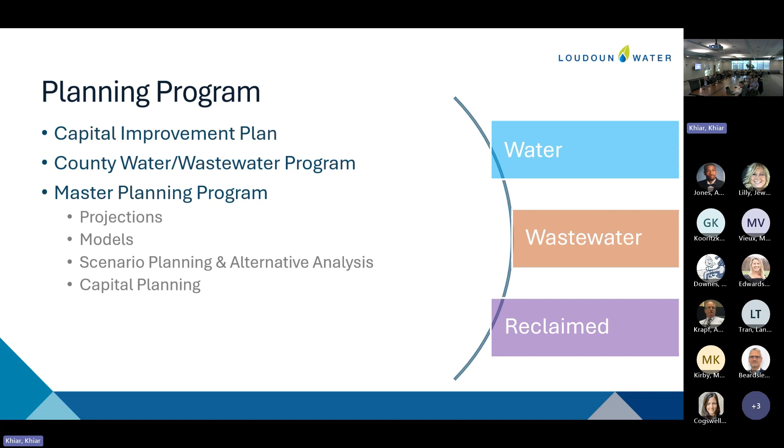And each of those master plans is going to include some projection work, which we're actually underway with - models, which we'll talk a lot about today, how we use those models in developing scenarios and alternatives, and then how that leads to capital planning.

The process of master planning hasn't changed for a long time. We start with the data we have or that we know, put that into some sort of model or projection, and then do the analysis on that. Today I really want to talk about the data, the modeling, and the analysis we do, not really the whole planning process.

We're really going to focus on the water distribution system planning. We could talk about reclaimed, which is very similar. Sewer gets a little different because it's all gravity, but the water distribution system is one of the keys we work on, mainly because that's one of our key public health and safety issues.

We need to maintain pressure, maintain fire flow, and maintain demand capacity under current and future conditions. We try to make sure we do that reliably, making sure we have redundancy in our system so that everything is networked, with multiple paths to get water to a location.

We're always looking for alternatives that help with cost. We want to make sure that whatever we put in the ground is right-sized for now and for the future, so we don't have to come back in a couple of years and build it again.

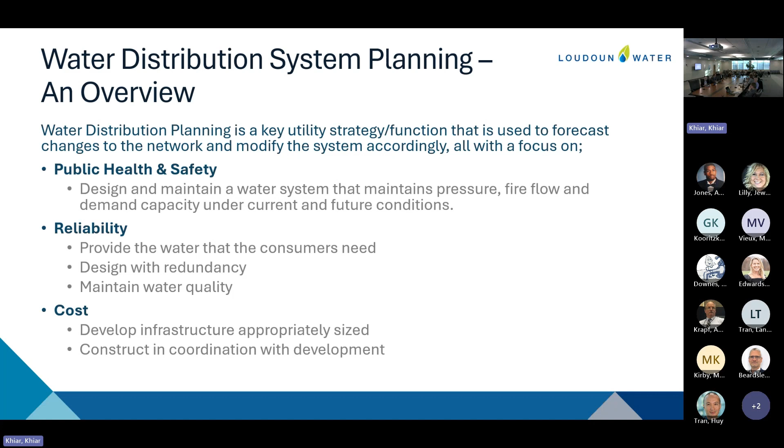It's very expensive, so our work is partially looking out to the future, but it's also day to day. It's kind of fun because we get to work on operational issues like helping our development team coordinate sizing and locations, reviewing fire flows. We also look a lot at maintenance outages or outages related to new construction and how that might impact our system, like whether there are concerns about when we can actually do construction or meet the demands we have.

We're one of the few teams at Loudoun Water charged with looking way out into the future, 20 to 30 years, trying to think about what we need to help support our whole system, whether that's permits, the capital program, or developing projections that lots of our teams use. Because of that, we're also one of the teams that does a lot of regional outreach, talking to our neighbors to understand what's going on not just here but in the region. So it's a great mix of daily stuff and the future.

So we'll dig in a little bit to the data that we use, which I love - we have such great stuff here, the tools we have - and then how we put it into action. I'm going to start with the data side.

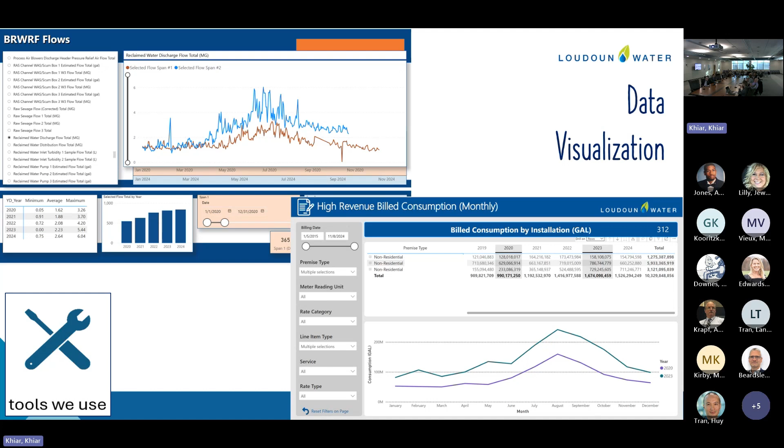But today I'm going to talk mostly about the water modeling that we do. I like to say it's mostly just lights and camera angles, so it's not that hard. But we do lots of different types of models in-house here that we manage. Our water distribution and reclaim distribution systems have all-pipes hydraulic models built for those. The wastewater collection system currently has a large pipe model, not every pipe, because wastewater is a little different than water since it's basically not networked the same way.

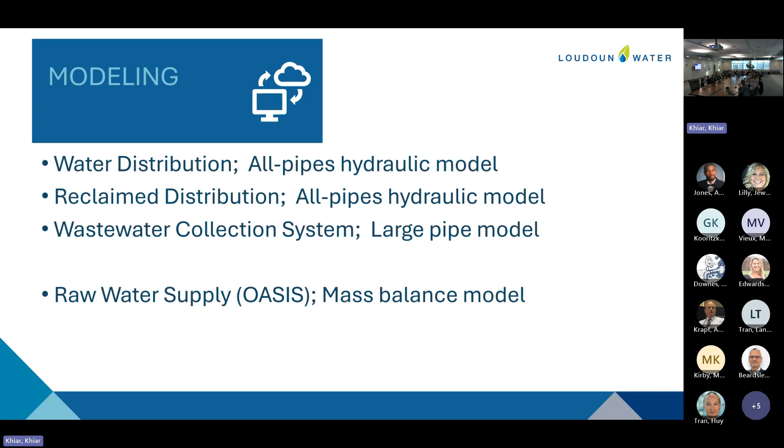We also have a raw water supply model that we're still in the early stages of, which Pam will talk about a little bit later. So we'll really dig into this all-pipes model, the distribution models, because those are our key tools. We take advantage of this model in a lot of different departments, a lot of different ways. We use it for operations, looking at outage planning, and we'll talk more about that in a few minutes. We also use it for master planning when we're looking at growth and developing the capital improvement plans.

So the modeling is basically helping us organize the data. It's a little philosophical, but it helps us organize the data so we can make sense of it and use it more properly. We also recognize that models are never precisely correct. When we have 85,000 different demands, different meters every day, changing all the time, there's always something that's not going to be exactly what's in the model, but they're pretty close and very useful for us.

The model itself is based on known physics, known energy equations. In one pipe, it's very easy to figure out what's happening with the water. But when you build a network of pipes, it gets very confusing because there are so many options for the water to move. Basically, it's a lot of energy equations, and we lose energy in the pipes as the water moves through, due to friction and as it turns different directions, so we have to figure all this out.

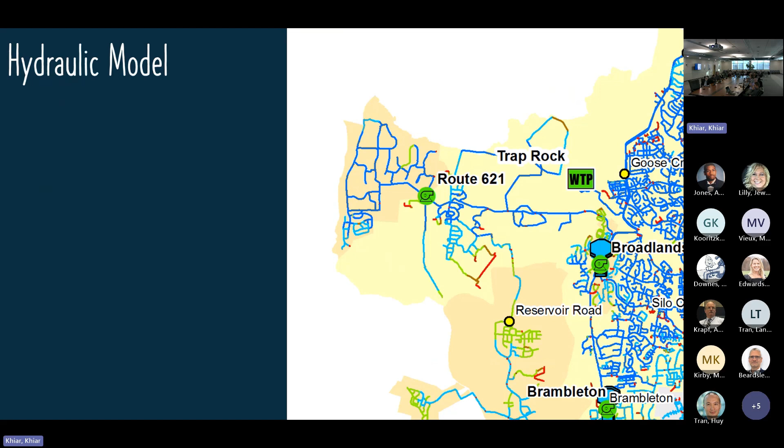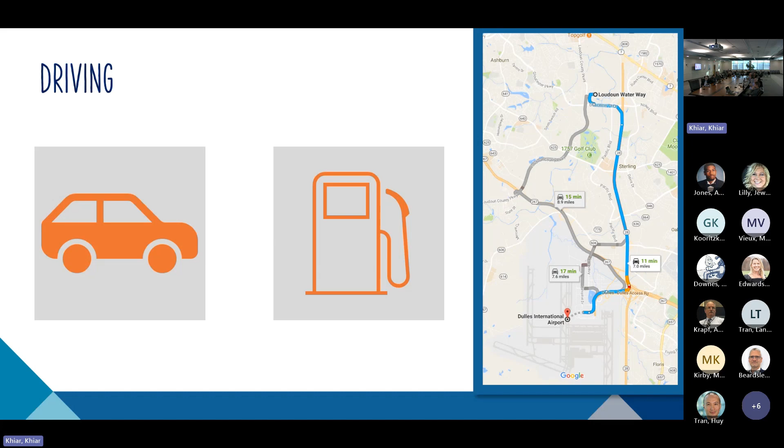If you want a parallel to what our network looks like, you can compare it to transportation or driving. Most of you, if you had to go to the airport after this, might pull up your map on your phone or in your car, and you kind of know where you're going to go. It would tell you if there are any blockages or outages. It's very easy to use, but there are a lot of parallels. If you went there, you'd probably go on the biggest roads that carry the most traffic. So in the water system, the roads are kind of like pipes. They're very networked, with lots of different ways to get to the same location.

The intersections are kind of like nodes or junctions. Stoplights are kind of like valves - we can change the direction or stop flow if we have to. And the cars kind of move like water, while the destinations are the demands. So a destination like the airport has a large demand, while a destination like your house probably only gets a few cars a day - it would be a small demand.

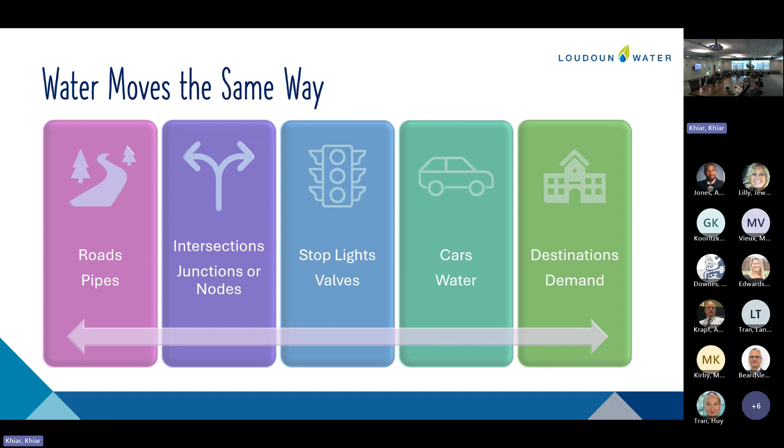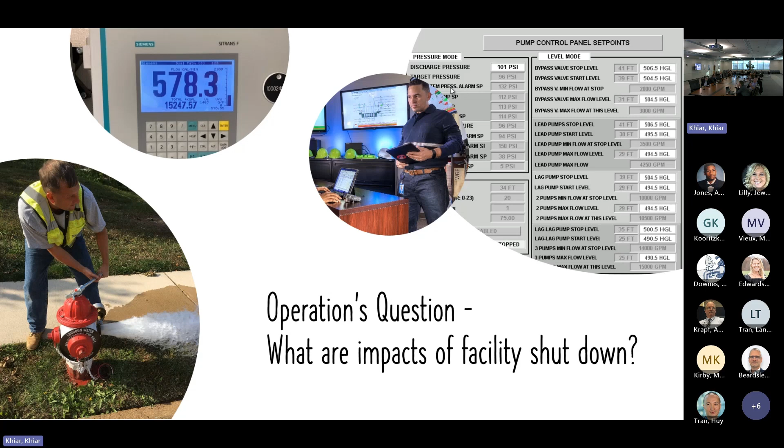So we'll dig into a couple questions and talk about how we actually used it here. We have an operations question: what happens when a facility shuts down? What are the impacts? Do we need to be careful for any reason? And then a capital or development question: how do we serve a new area?

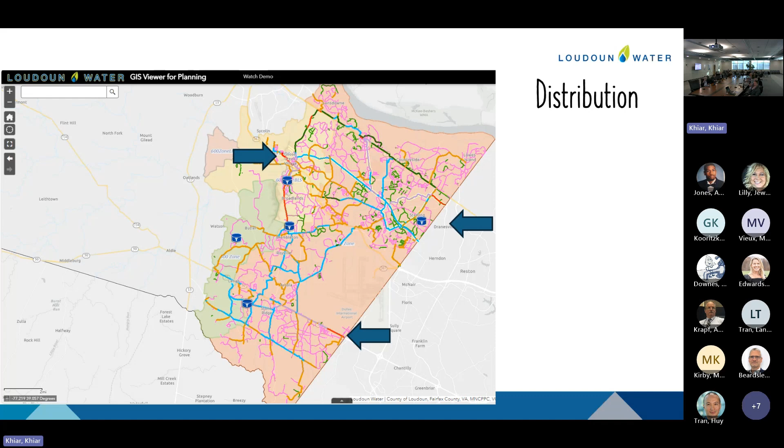Interconnecting all this is our highways or freeways - our major pipes. And within that system, we have the smaller network of distribution level pipes. So we split it up between transmission and distribution, and there's actually a whole bunch more pipes on here that you don't really see in this map, but they're all shown here in green.

So you're kind of looking at the same thing again - we have the 3 sources, the roads, the facilities, and we can take the model and watch how the water moves through it to perhaps trace if there's some quality concern. If we're going to shut down a system, we can look at how that water is moving to figure out how it's impacting that.

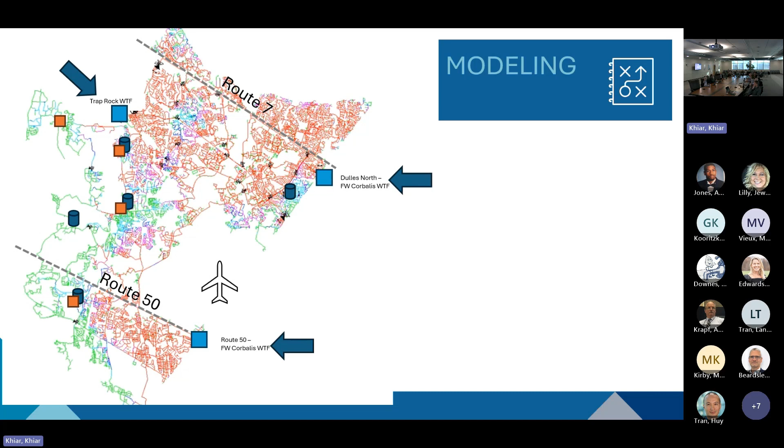So we're going to focus in on this 600 zone, the green shaded area. And if you look just at that green shaded area, it also has its own sources: 2 pump stations that are pumping water from the lower energy zone up into our 600 zone, and a storage tank which, to help meet our peak demand, is going to drain some and help supply water to that system.

So you can kind of think of it as having 3 basic sources. Just a little more background - in that system, it's almost 5,000 meters, and they're almost all residential, which means the usage is very similar. We also have a lot of usage out there that's large lot residential, with a lot of irrigation.

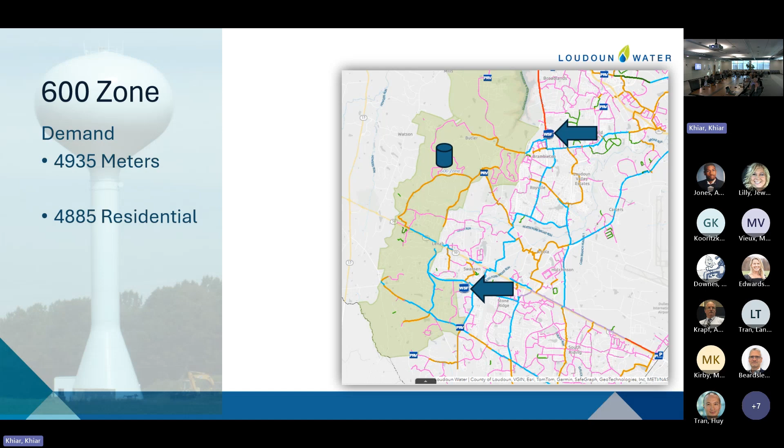To supply that much water, we need all 3 of those sources - both pump stations and the tank. This is getting close to the limits of what we can supply to that zone. If you trigger your memory, you'll remember we're actually doing some upgrades in that zone right now - we're doing the Dulles South pump station upgrade.

Brambleton came through as a study too, and we're doing some construction out there for some transmission mains. So if we're going to look at this, we may think about whether we can shut something down during this period. We know it's no, so a lot of times our capital team will tell them we need to do it later in the year.

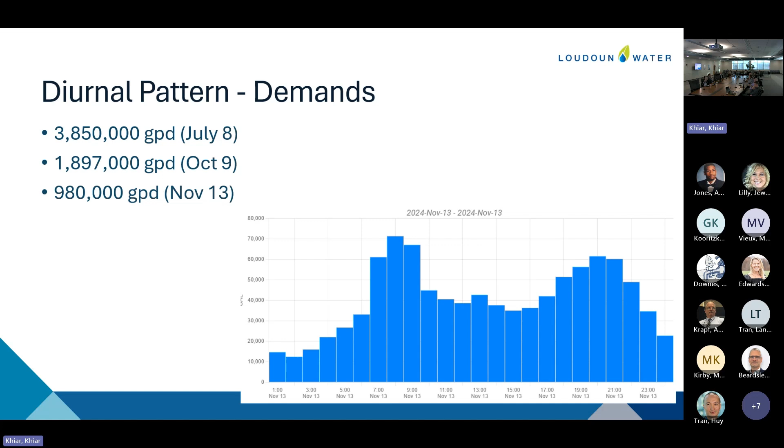So this is our Dulles South pump station. We knew we actually had to shut it down - we're adding a new pump out there. Our questions were basically: can we meet demand, and will we maintain pressure?

The operators, our distribution system operators who have great intuition, were a little concerned about this one because they knew the station gets stressed, especially in the summer.

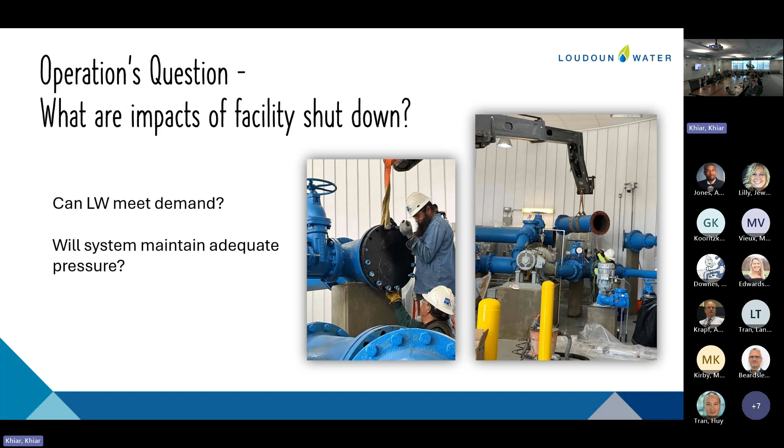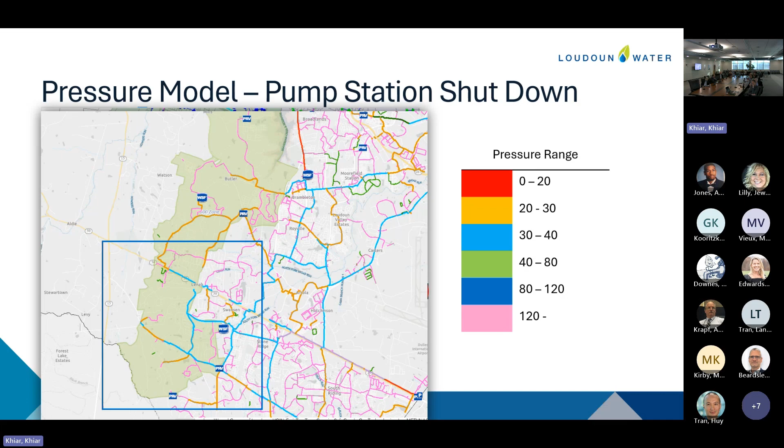So if we look at that zone, you can see where we are. We're going to focus in just on the southern part of that zone because the shutdown to our facility is that southern pump station. If we zoom in, this is what the model actually looks like. I've added the arrow to show that Dulles South pump station is going to be out of service. We can see all the pipes are in there, and we also have dots, or nodes - those are our junctions.

One of the things the model allows us to do is color code that to look at pressures however we want. Currently that's indicating a lot of blue dots, relatively very high pressure in the 80 to 120 range, and a lot of green dots, which is 40 to 80. That's perfect - that's what we want. We want our system to be in that range so all your household fixtures, everything, works.

So this is actually the model run at that higher demand. We tested it at that just to see if we could actually do it, and it's a good example for a session like this.

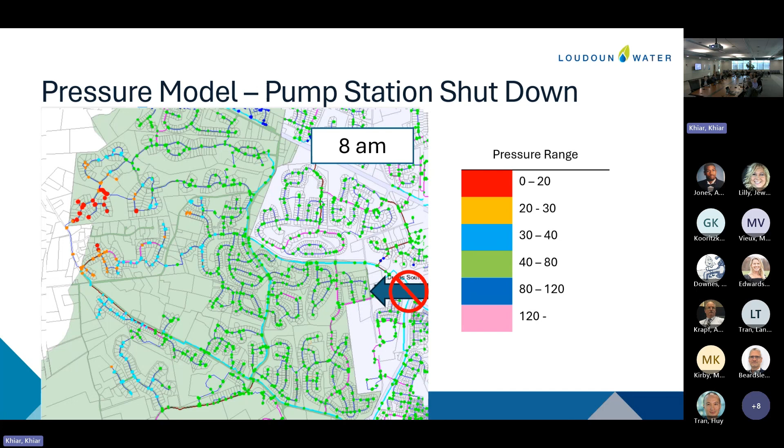If the pressure in the pipe gets too low, then we risk having water leak into the pipes. We never want that - if we have any leaks on our pipes, we want it to leak out. If it's leaking in, then we're getting contamination. But it is curious, by 8 a.m. the system largely recovered, so we're close to meeting that demand, not quite. We have improvements planned that should make us work without that pump station soon.

So even though we modeled it and did all this, we actually did the shutdown around, I think, right at the end of October. And the other thing our AMI or our meters do, some of them have pressure sensors built into them, and we can monitor the pressure out in the system.

So we went back and said, okay, let's do a little forensics. Did this work the way we thought it would? And we went back in and looked at one of the meters in that southern zone there, in that area, and said, well, what are the pressures?

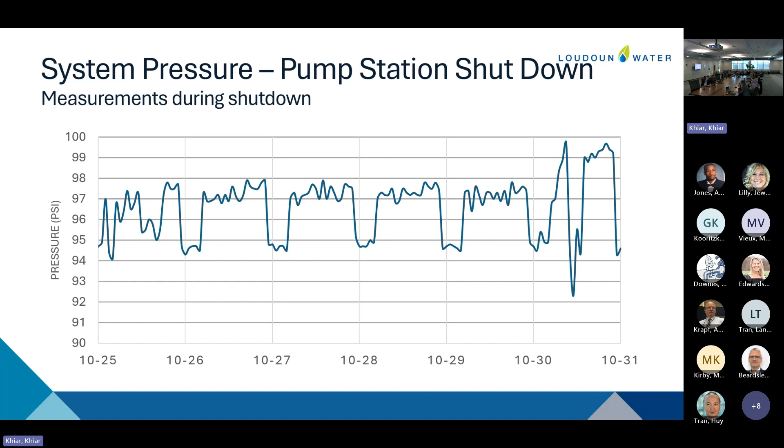It really helped us use the model to kind of predict, and then we went back and said, did it actually work?

So when we look at a zone like this, we'll look at all sorts of things. We'll track tank levels. Tank levels are a good indicator for us of whether the system is behaving properly. We want the tank levels to go up and down every day so we can move water in and out, keep it fresh for all of us.

And so we can use this all sorts of ways. We could have color-coded the pipes to show velocities or show other indicators of our system.

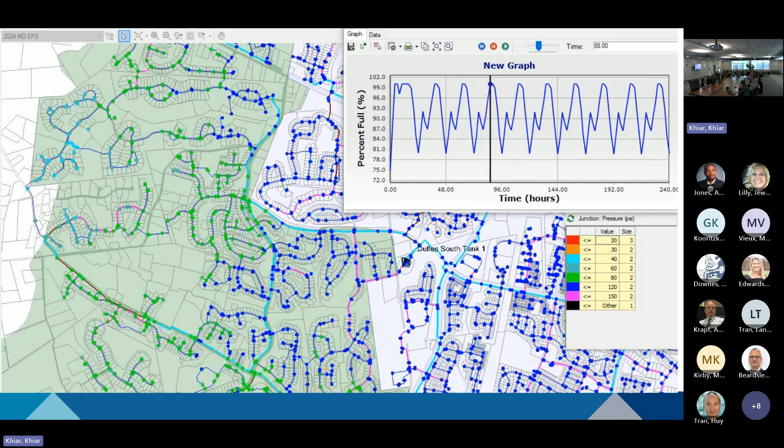So I'll move on unless you have any questions.

It's quite impressive. It's fun to use. It obviously takes a lot of work to maintain it too, as we change settings, and our operators are great, but they like to change things and make sure it's working the best.

So we'll move on and do a very different application here and look at capital development, kind of, and how do we serve a new area.

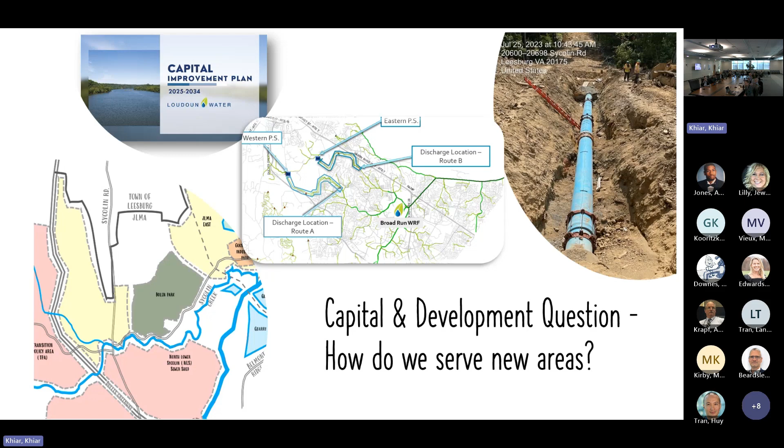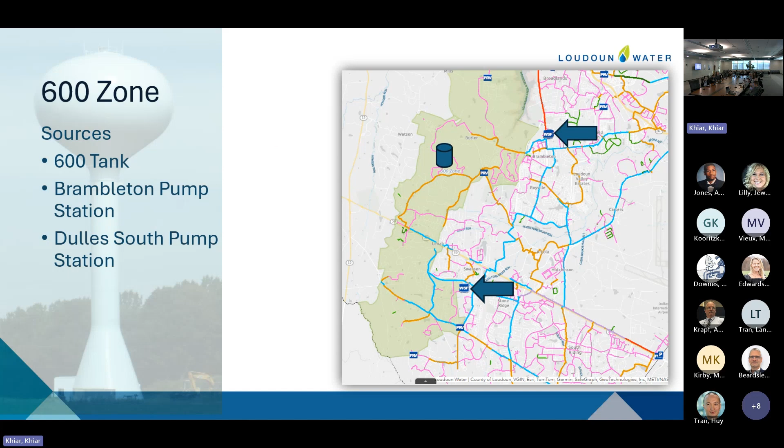So if you remember the 600 zone, we had known sources, we had a storage tank, and not all the pipes are shown there, but the major pipes are shown on here. You can see we have a whole network of pipes. We have a backbone. If there's new development there, we can basically just add on a small piece to our existing system.

If you flip now and look out at the growth area out toward the JLMA, and this really includes some of the westernmost parts of our central service system, we kind of know that there's a source there by Trap Rock. We have some big pipes. We also know there's a large pipe that runs up and down Belmont Ridge Road, but our network out there is non-existent.

We don't have anything out there. We don't have any water pipes, any sewer pipes. We have no facilities. So if we're looking at growth out there, it's all a question mark right now.

So we'll kind of walk through the general steps we take to look at this kind of system, or any parts of our system, and help review it. These methods would also apply even to new or existing areas where we're perhaps seeing a change in our land use or zoning that's allowed, or a lot of redevelopment.

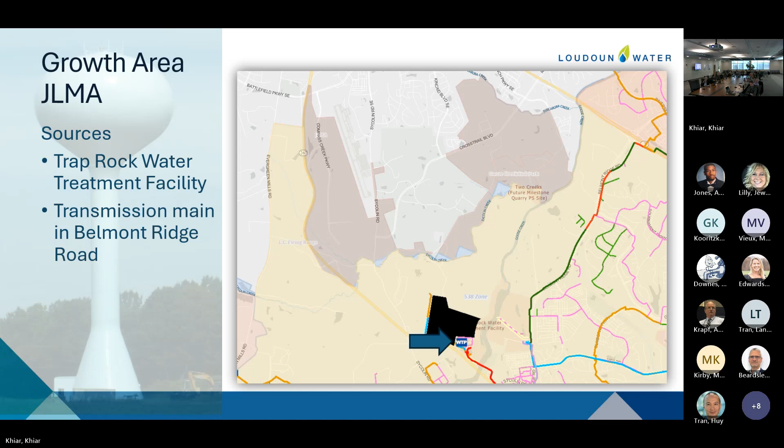So this is the scope we kind of develop for how to look at all this, and this is standard planning again. We take the data, we look at the demand, the flow projections, we'll update our models, make sure all those demands are in the right place in the model, and then we'll run the model to look at different scenarios and alternatives. How do we serve this area?

And we're going to look mostly in the model at that peak day. Can we meet the pressures? Can we meet fire flows? And can we keep velocities down low enough so we aren't risking ourselves, risking our pipes?

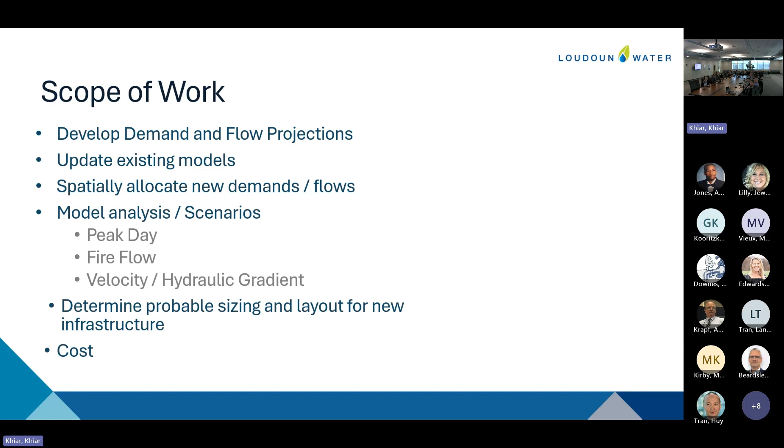Sometimes when you talk about velocity, we talk about it in terms of hydraulic gradient, in terms of how much loss, how much energy we're losing in our system. So then we'll lay it all out and come up with a plan. And then we also always think about some other sensitivity analysis or other scenarios that we may need to keep in the back of our mind.

When JLMA first came up, our first thought was we're close to the town of Leesburg—do we need to make another connection, or not? We talked with them and with the county. At this point, we're not making a connection, although there may still be some discussions there. We're thinking about water quality—we don't want huge pipes with dead ends that just sit there for years and never get used. So we're always thinking about that, and of course the demand and flow projections are variable.

Are you able to use the model for water quality, the model itself? I would say no.

We use the model for water quality in one way—we can look at water age. The model will help us determine how long the water is in the system before it gets used. So if we start at a source, it might take 4 days to actually get to a meter and get used. Water age is a great surrogate, a great indicator of water quality, but it's not exactly like chlorine decay or how disinfectant decays in our system, because that's highly dependent on temperature, pipe conditions, and all sorts of factors. It makes it a lot trickier.

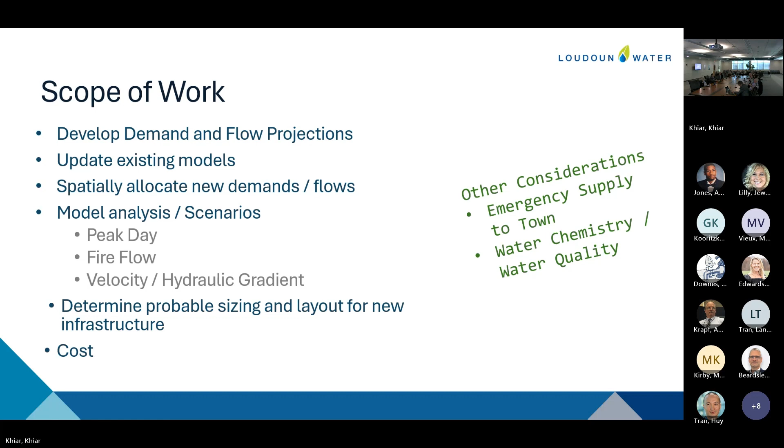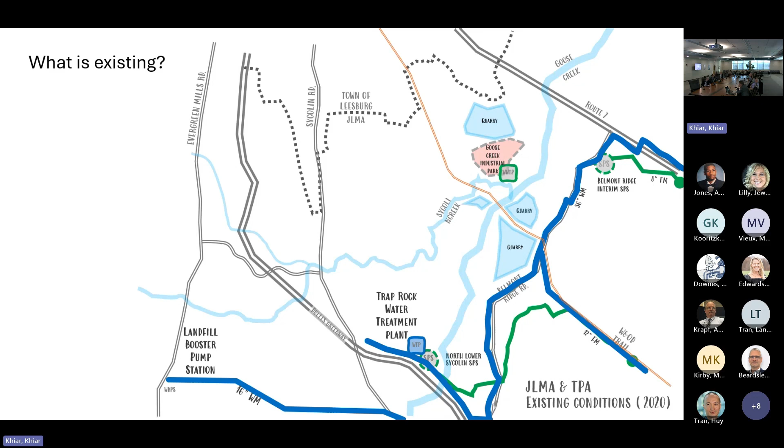That was a big question mark for us at first, because we really didn't know what was going to happen there. The other tricky thing about all this is the data centers—if they all came in as water-cooled data centers, that's a lot of demand. If they come in as a mix of water and air-cooled, it's less demand. If they all happen to be air-cooled, it would be a lot less demand. So it was a very tricky proposition at first to figure out what the demands out here would be and what we could meet.

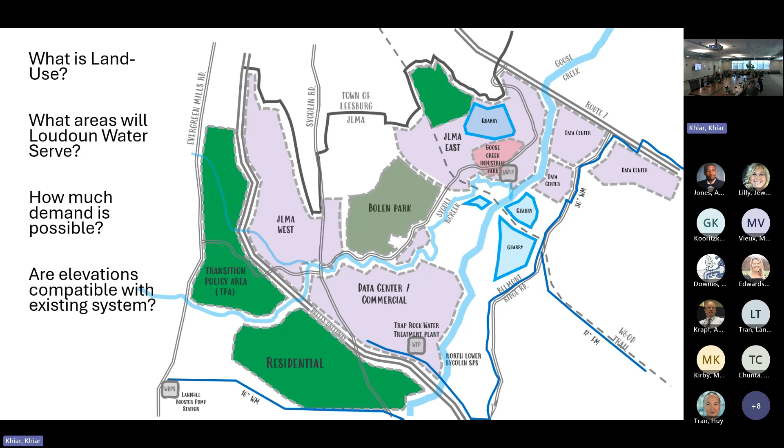The other thing we looked at quickly was the elevations—do we need to push the water up even higher and build a new zone? Luckily, all this area is compatible with our existing zones; it's easily served with our current energy levels. So we took this system and, when we first started, we were just sketching.

And we say, let's follow the roads and put in some major infrastructure. Where might that go? So we laid out a quick backbone of larger pipes that would serve all these areas. Then we also started thinking about the interconnections, the smaller networks we need to serve this. This all starts really rough, back of the envelope.

But it gives us a good feel for what might come out there and what kind of sizing we're looking at. Then we'll spread demands throughout the system based on land use or developments we've already heard about. In this area there were a lot of developments almost ready to go, so we had an inkling as to what was coming. We knew there were going to be 1,000 homes up toward the JLMA West, in that transition policy area. So we had some idea of what was coming. We spread all these demands out, put them in the zone, and then started basically sizing pipes.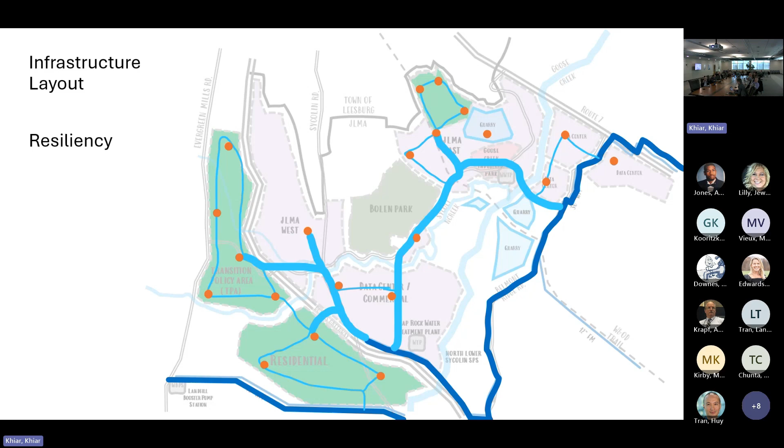What size pipes might we need? We came up with a whole series of proposed pipe diameters, and some of this is based on our rules of thumb. This might be a little hard to see, but there are pipes mixed in there along with different boundaries. This was one of our very first early versions of this. It's changed significantly since then.

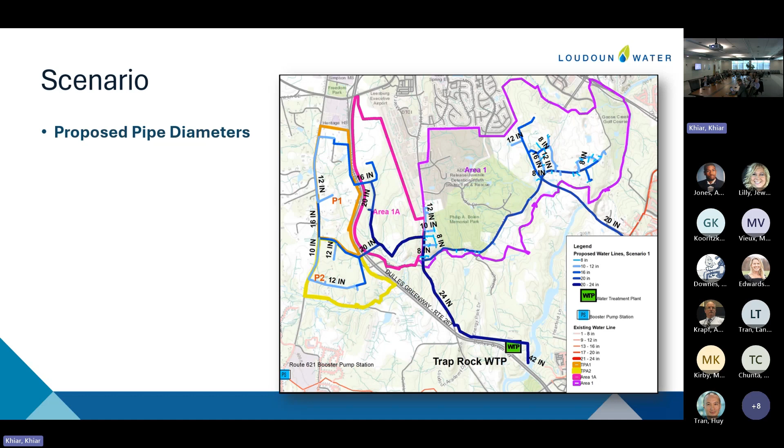But we would review this and look at those key factors. One, what is our max day demand? Can we keep pressures up even under max day demand? Regulatory goals are above 20 PSI, but for this level of planning early on, we want to make sure we have at least 40 PSI everywhere. That gives us a conservative approach, a bit of a buffer or contingency.

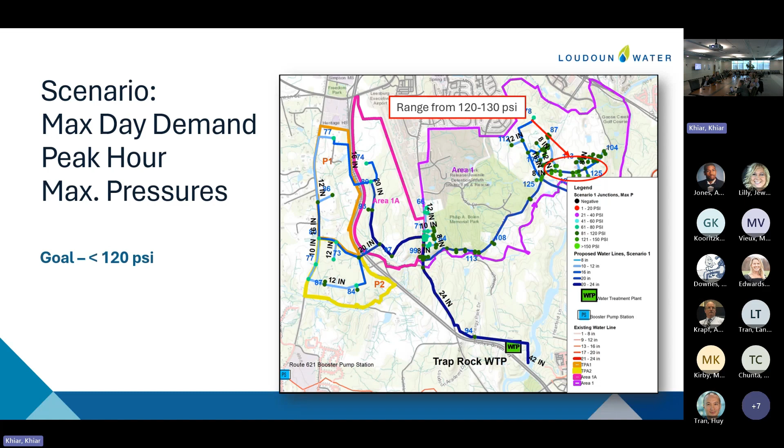We also looked at the max pressures, just curious how high they might get to serve this area. There are a few areas up near the low elevations of the creek that get pretty high, but they're reasonable, we can deal with that. We have a few parts of our system wherever it gets really low elevation where we have some high pressures, and our teams are used to that, so we can design around it.

We'll also look at basically velocities, measured here as kind of the hydraulic gradient, but this helps us tell which pipes are getting used or which are close to the sizing limit we want. The dark blue pipe coming out of Trap Rock down at the south there, we know that's about at its limit. We might almost want to upsize that one, and we actually have some parallel pipes in there now.

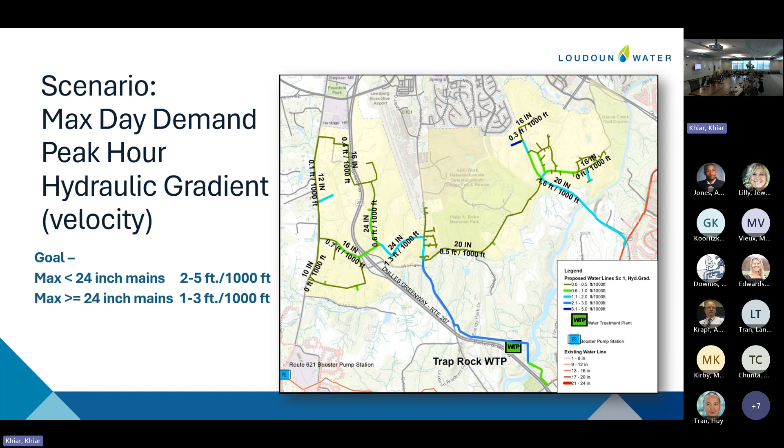And then we'll also look at fire flows. Can we meet industrial level fire flow and maintain pressure? Basically this said yes, with this size pipes and the demands we assumed, everything works. So we were happy with this general layout. We've continued to refine and change this quite a bit as we included some of the new demands in our Western service area, and as we tied it all together.

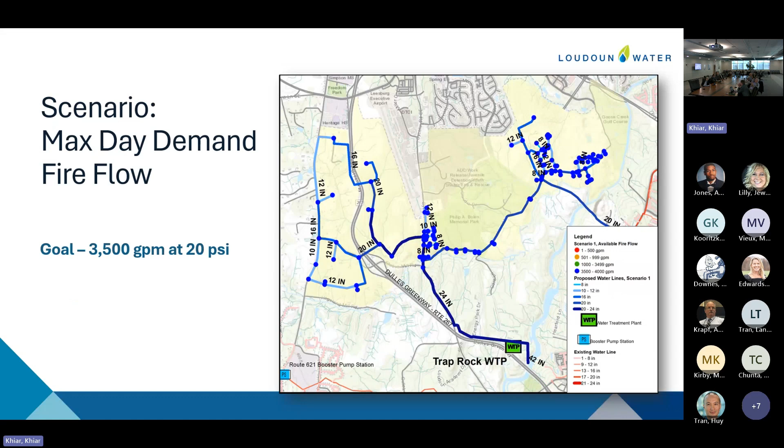So that's kind of the look at the new part of our system. But of course, we also tended to look at, well, what happens to our existing system? If we add all this demand out here, do we impact how our tanks change, how our tanks turn over? Because that's one of our key indicators of, are we meeting our demand? Are we keeping up with things? So we did that, and we looked at our central system.

And what you're looking at here, it's a little hard to read, but those lines on the graph are basically tank levels. The tank levels go up and down multiple times through this 72-hour extended simulation, and we can run this over time. We can watch the tank levels go up and down. That's exactly what we want. We don't want them to get too empty. They all stay more than 50% full. That's kind of a rough guide, not a rule. And then they go up and down, meaning we're moving water in and out, keeping the water quality fresh. It helps everything. So that's our existing system, no new demands, things are working.

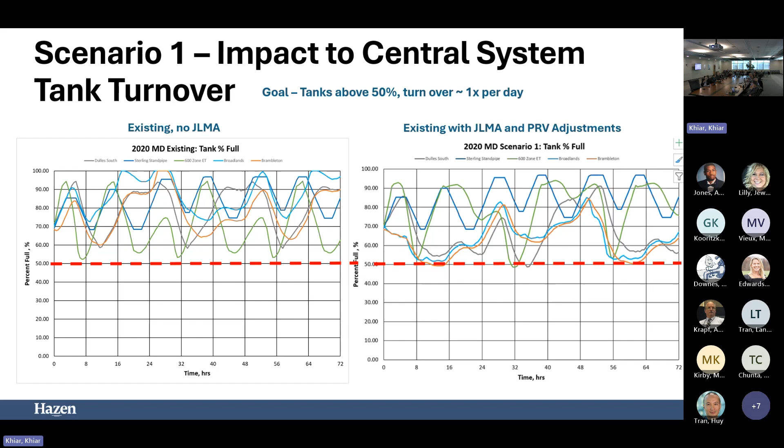But then, of course, we didn't just look at today's system. We tried to look out in the future. And we said, okay, with future demands, what's going to happen? And we didn't change our existing infrastructure at all. We just added a bunch of demand.

So you can see in this system, without the JLMA, even before that, we knew that one of the tanks, that's our 600 zone tank, actually starts to empty a little bit more. That would indicate, hey, we need to do something out in that zone to help improve supply. That tank is now being stressed a bit to meet that peak day supply. So we're actually doing those things with the Dulles South upgrade and so on that we just talked about.

And we also added in the JLMA and looked out in the future, and we say, oh yeah, another tank's getting stressed here. We're getting it down below 50%. That's a problem. But this is also 20 years in the future. So this gives us that indication, okay, this is going to be one of our capital projects. We need to look at how to improve this.

We also need to monitor, do those demands actually develop the way we think they might develop? Because those demands, everything always changes. The data centers get bigger, but they get more efficient, but their peaks stay high. So we keep on watching that. As the development moves in, sometimes land use changes, density changes, and every once in a while our boundary changes, which is even more tricky.

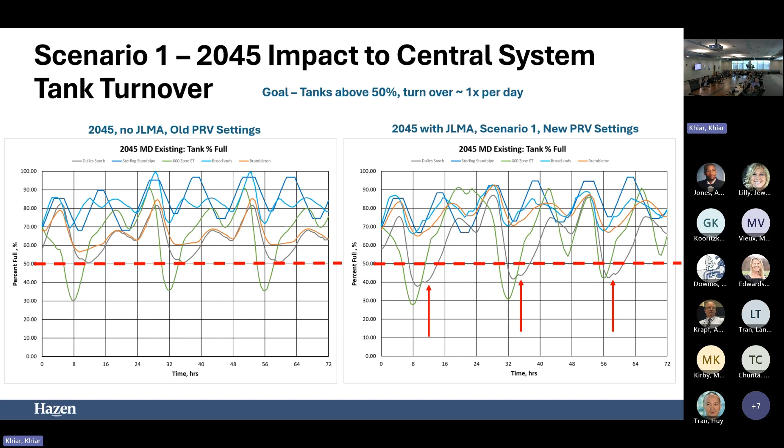But that gives us time, and it gives us an indication that, hey, we need to do something to help improve this. And this is what we'll be going through in the master planning process, looking out in the future and trying to make sure that we're ready for that. So those are kind of the tools we use.

So just as a planning program, some of the next steps that you'll see from us, and we'll be back in front of various committees over the next few months, talking about master planning, perhaps sharing some of the projection work that we've been doing. We'll be talking about model updates and actually developing that whole new master planning for the water system, for the wastewater, for the reclaimed. We actually were here already once for the reclaim, well, not with the CIP committee, for the wastewater system, because we started some flow metering and model development on that project. And this should all lead to, with those new tools and visualization that we have, better communication, better visualization of what we have, what we know, so we can share it with our capital teams, with our asset management teams, with land development, with everybody.

If you want to talk about the future of modeling and what's out there, there's a lot of tools that vendors want you to buy. A lot of it has to do with integrating SCADA data directly into your model, perhaps building a real-time model that's very much up to date, giving you better decision-making for day-to-day operations, making a better tool of it.

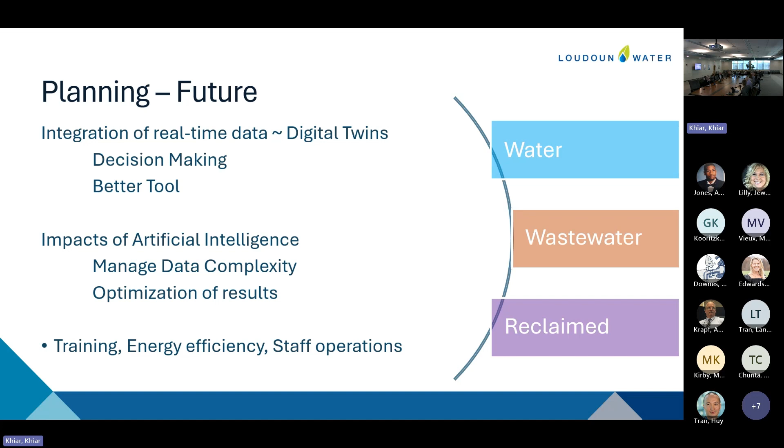So thank you, Pam. I think you're up next. Yes, and this is something we're really excited to discuss with you. This one is a tool, OASIS, and we're going to talk about how we envision using it, why we selected it, and the origins of the tool.

This OASIS tool, I'll call it a decision support tool, is a model, but it's a mass balance model. It operates differently from what Darren was talking about with our hydraulic models, which work on conservation of energy. This one is really more arithmetic—mass balance, what comes in balances with what goes out.

This tool was originally developed back in the late 80s for the ICPRB, and it supported different cooperative exercises on the Potomac River. That's really the basis of it—it has all of these regional assets. You see the whole Potomac Basin here with all of the reservoir assets.

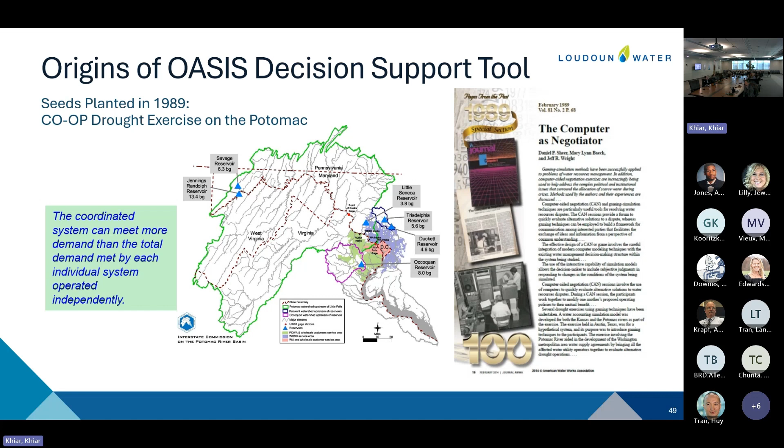Sometime after, I think into the 90s, the ICPRB developed another tool called PRISM, which is their preferred tool, but they still maintain this original OASIS tool, which provides us an opportunity for cooperative modeling if we get to that point in the future.

Overall, OASIS was developed by a firm called Hydrologics, and then they were acquired and merged with Hazen maybe 5 years ago. Since its lifespan, this model has been used pretty extensively across the country in some interesting applications.

River basins have utilized the model. States have used it for state-level water supply planning, hydropower applications, hydropower negotiations in particular, and all types of collaborative decision making, because you can run little tabletop exercises with the model.

Some of the things we're probably most interested in it for are looking at climate change—we've been exploring how climate change might impact the resource and the availability of supply. Tied to that is drought management and capacity, like Darren's been talking about with our facilities. We also expect we'll be using it for a lot of operational support.

To utilize this, we took the ICPRB model and populated it with all of our assets key to the raw water supply—raw water intakes, raw water reservoirs, the treatment facilities, Broad Run, because Broad Run is a factor in our permit for water withdrawal, and our Fairfax Water purchase, because that also balances out the demands we have in our system.

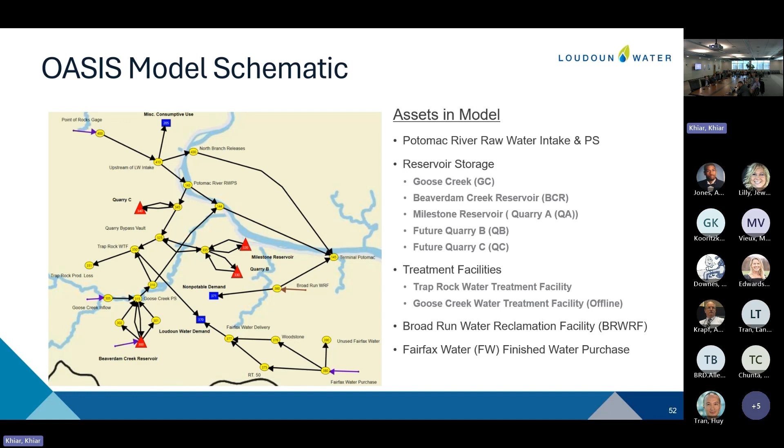There are 3 different configurations we can utilize this model for decision making. We can use it for planning, which creates trends similar to what we were seeing on the finished water side—reservoir storage, we can look at reservoir storage fluctuation based on demands in the system. We can also utilize the model for operational purposes, looking at the probability of low flow in 90 days based on today.

The way we can do that is because this model is pulling in databases much bigger than Loudoun Water. We're pulling in data from USGS river gauges and NOAA data, grabbing onto larger scale, basin scale databases, which enables us to look at percentile probabilities, a really interesting application of this model.

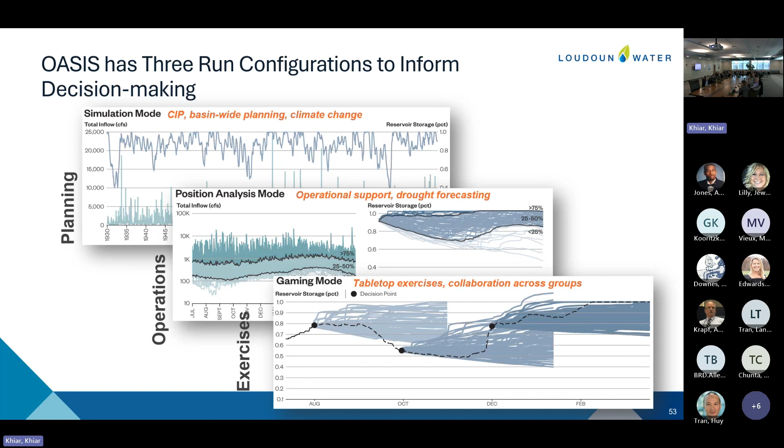From an exercise perspective, you can run what's called a gaming mode, where you can say, okay, this is the probability, these are the different streams that might happen based on today. What if the flow drops in October? You can run different what-if simulation type exercises, and integrate your planning team with your operations team.

So really, we wanted to give you far less detail than Darren. I don't have exciting graphics to show you today. I just wanted to get you excited that we have this tool that we're going to be using for planning and operational support, as well as permit compliance.

Yield is important to us. In 2014, Loudoun Water acquired all the Goose Creek Beaverdam assets and the water plant. Then in 2018, we brought Trap Rock online, and now we're projected to have Milestone on in 2028. So we keep adding complexity to our system, but that's also reliability and redundancy. Something like this model gives us the ability to determine the best use of the different assets, yield, and utilization of those reservoirs.

We've currently been using it based on flow prediction of what types of turbidity impacts we might be experiencing at the Potomac intake. It's been a useful tool for the water operations team, even in the short term for that, and then for permit compliance.

We can take these demands we've been talking about for the distribution model and look at them rolled up, with time steps more like days here, not hours. So you're really looking at daily permit compliance, weekly permit compliance, annual permit compliance. We'll be able to take these numbers and run what-ifs on how we might best work the assets together.

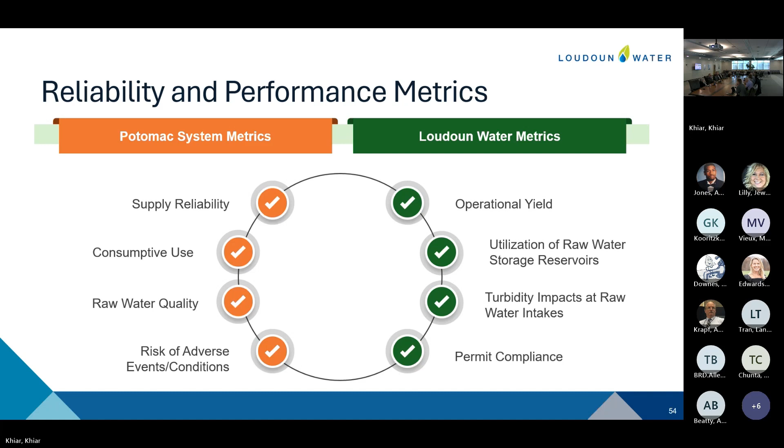So I'm Jessica Dezar, and this morning I'm going to provide you all with an update on our compliance with the lead and copper rule revisions. The Water Resources Committee has heard from me a couple of times already. I first presented information about this rule in 2022, again in 2023, and most recently we had a CIP project approved by the board to get support from CDM Smith to help us race to the finish line here with this rule. So you've heard this a number of times - this is probably the final wrap up as it relates to the lead and copper rule revisions.

So just a real quick rundown of why the lead and copper rule revisions exist. EPA put this revision out to the original lead and copper rule with a compliance date of October 16th, 2024, several years ago. The goal is to protect our children in child care facilities and schools - they are the most at risk with lead exposure. Ultimately, make sure that all lead gets out of our nation's drinking water, and empower communities throughout the U.S. with information about the effects of lead if they were to be exposed to this.

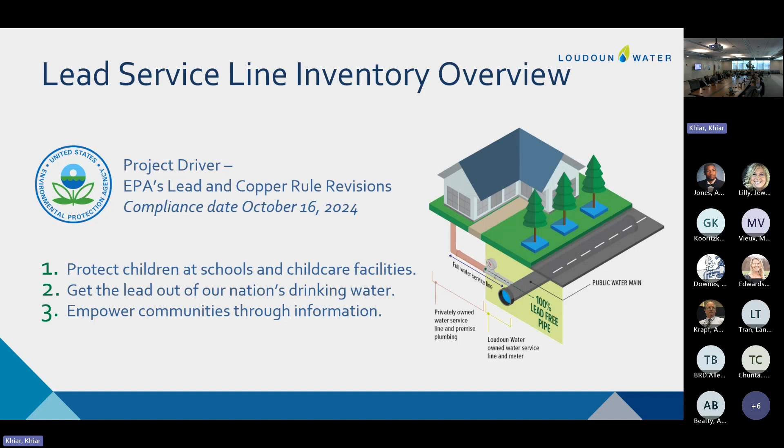To cut to the chase, our lead service line inventory is complete and we've confirmed that the entire system is not lead. I'm going to get into the details of how we got to that determination, but we've met the deadline, it's all been approved by VDH, and we're in great shape with our lead service line inventory.

So a little bit about what we started with and how we got to this point of being able to say we don't have lead. First, we developed our baseline based on the private side of the service lines by looking at the age of the properties. The building code changed in 1978 so that the private side of service lines could not use lead, and within Loudoun County we follow that building code.

We took the records we had of where all our customers are and cross-referenced that with a data exchange with the county, which provided the year properties were built. Based on the cutoff date of 1978, anything built in 1979 or later we could safely say is not lead. If built in 1978 or earlier, we needed more investigation. About 7% of our overall service lines fell into this unknown category, about 5,700 service lines.

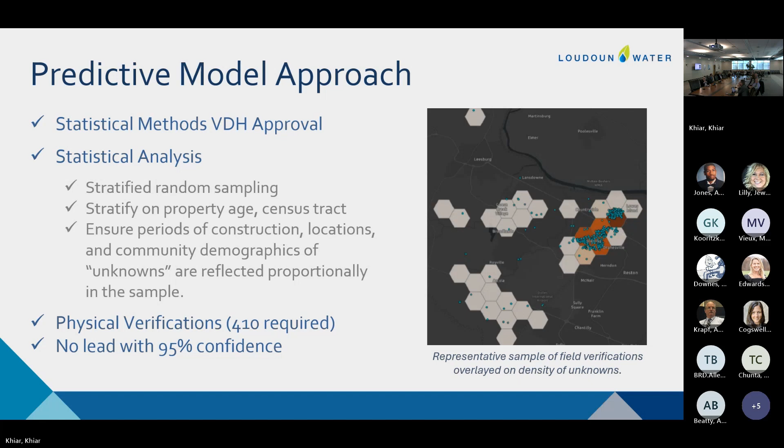Some of the things that were really important to helping us get to this point: I mentioned the communications campaign was a huge effort, working with our customers through mailings, door hangers, door knocking, and phone calls.

Our customer relations team became quick experts in lead and copper. They were fielding a lot of calls and helping customers get the information, providing that back to us to update our database, and scheduling all the appointments with our water quality team to go out there. It was a huge company-wide effort where pretty much all groups had some level of involvement in making sure this happened.

The other thing we were really proud of was our peer utility collaboration. Early on, about 2.5 years ago, we set up a work group with stakeholders from each of the towns within Loudoun County, along with some key members from the county as well as from LCPS, and we formed a little group.

We got together on a regular basis and really wanted to ensure we were all on the same page, communicating the same message throughout the county, following similar methodology, and bouncing ideas off each other. It was a great way for Loudoun Water to support the towns as they were working with fewer resources, and to share a lot of information back and forth, which made things easier on all of us.